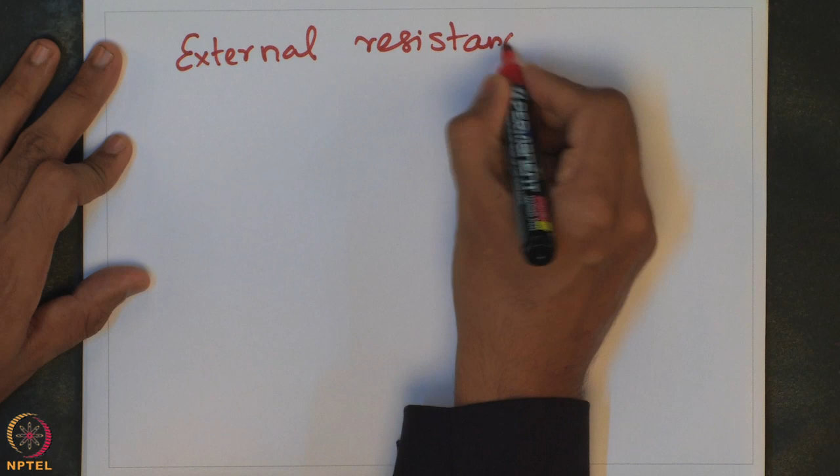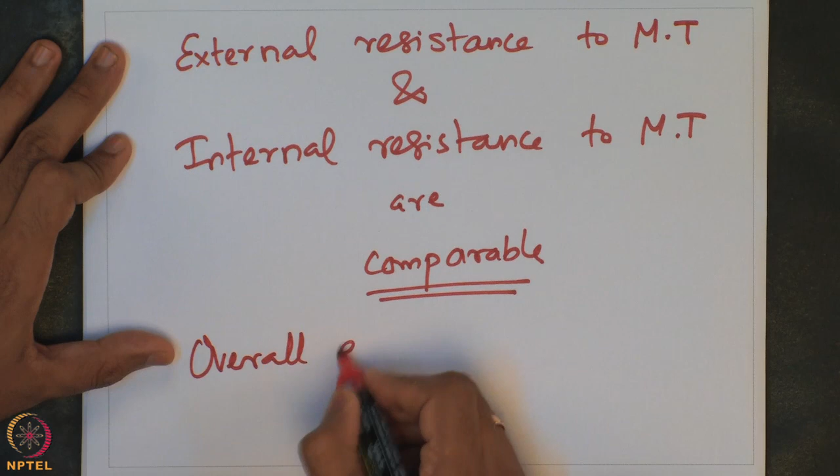We will assume that the external resistance to mass transport and the internal resistance to mass transport are comparable. We are going to look at what is called the overall effectiveness factor, defining this quantity in this lecture, which accounts for both the external resistance to mass transport and the internal resistance to mass transport. We will particularly look at the case of a first order reaction.

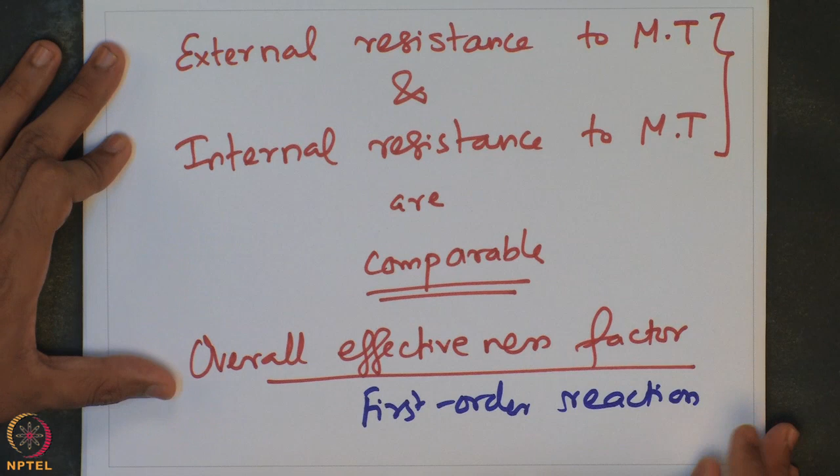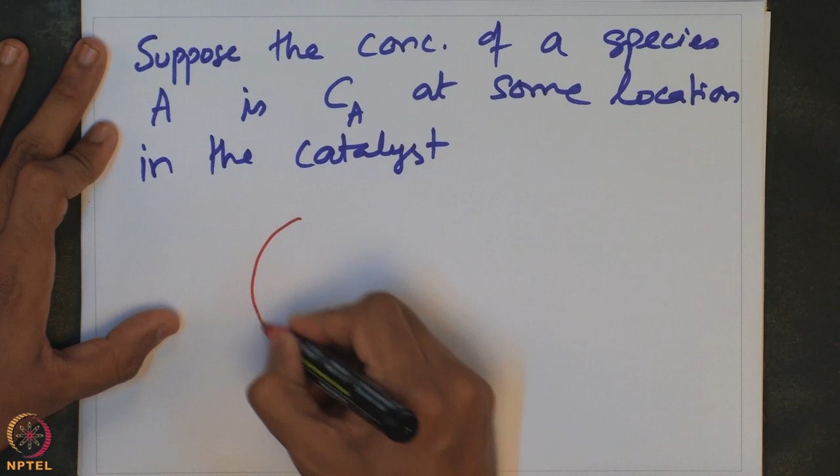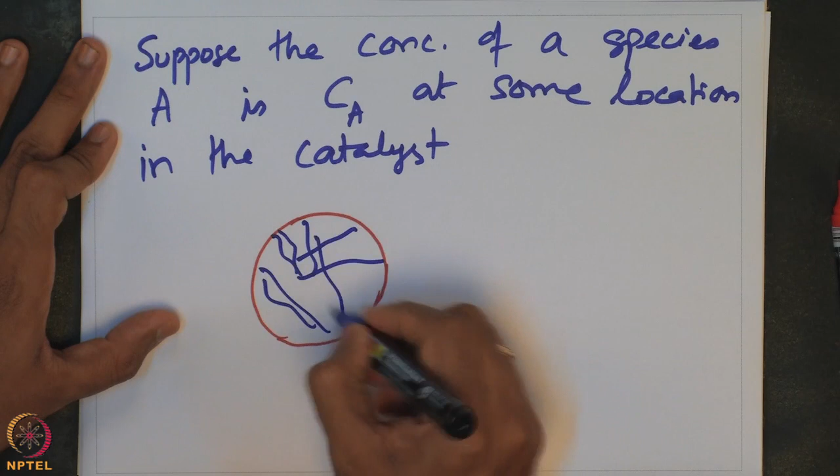Suppose the concentration of a reacting species A is, let us say, Ca at some location in the catalyst. Let us sketch a catalyst here. Suppose we have a spherical catalyst, and the pores present here are the pores in the catalyst pellet. Let the bulk concentration of the species be Ca,bulk, the surface concentration be Cas, and the concentration at some location inside the catalyst be Ca.

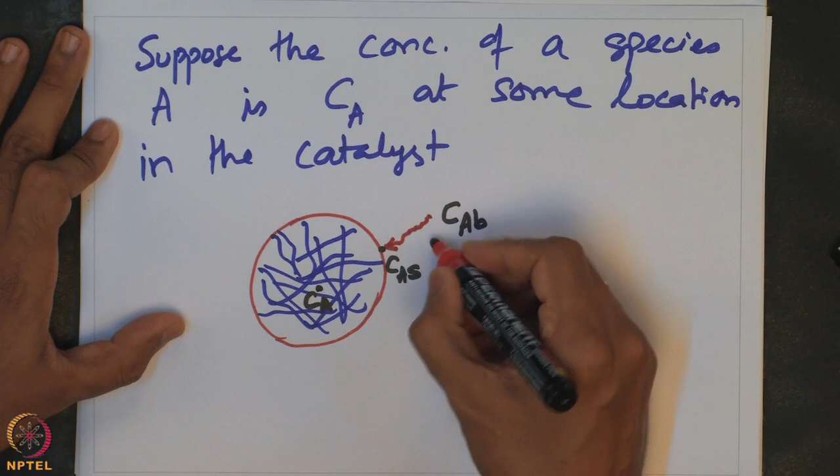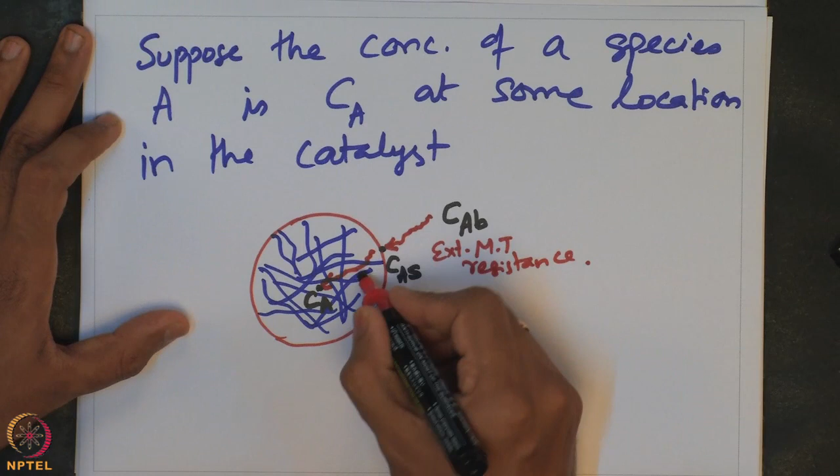So now we have species diffusing from the bulk to the surface of the catalyst, and there is a resistance offered because of this diffusion — that is the external mass transport resistance. Then there is a resistance offered for transport inside the catalyst, that is species going from the surface, at concentration Cas, to some concentration Ca inside the catalyst. This is essentially the internal resistance to mass transport.

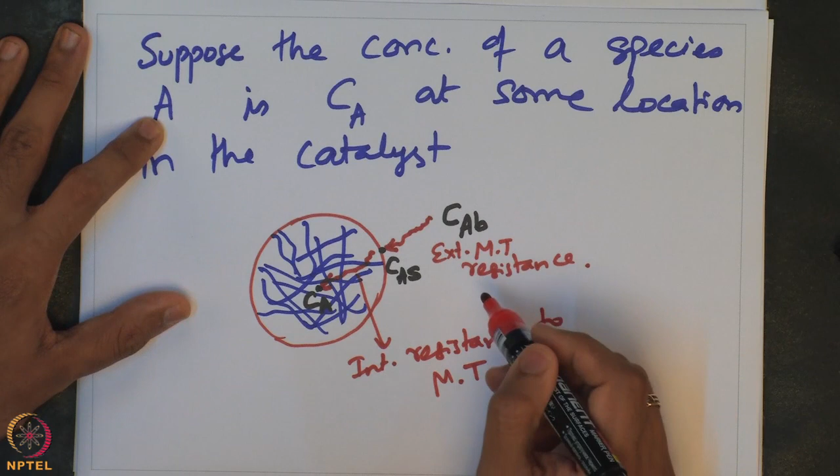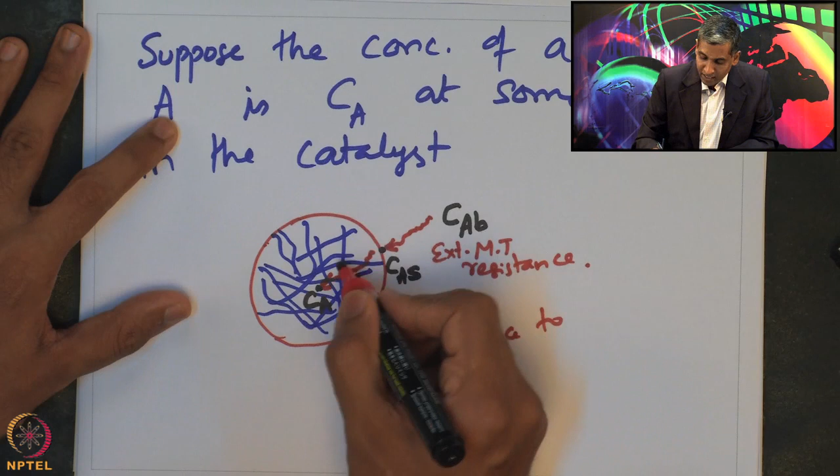Earlier we observed that when the external mass transport resistance is the only significant resistance compared to the internal mass transport resistance, the reaction gets completed very close to the external surface of the catalyst. On the other hand, if external mass transport resistance is very small compared to internal resistance, the reaction happens in several parts inside the catalyst, in the active surface area in the pores, and the extent of species penetration inside depends on the extent of the internal resistance offered to mass transport.

As a result, one can think of a situation where if the resistances are comparable for both external mass transport and internal mass transport, the reaction would happen both at or close to the surface of the pellet and also in the active surface in the pores inside the catalyst pellet. So what is the reaction area? What is the area in which the reaction happens now, if this is comparable?

The area in which reaction occurs would be the internal area plus the external surface area. So the reaction would essentially happen on both the internal and external surface area. If we now say that these two resistances are actually comparable, then we have to consider the area where the reaction happens as both the external surface area of the catalyst pellet across the whole reactor bed, and also the internal catalyst pellet area available in every catalyst present in the bed. Let us see how to consider both of these simultaneously.

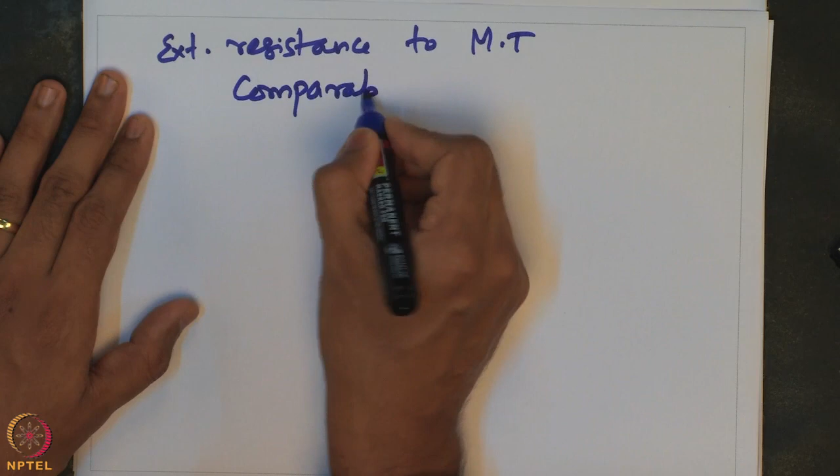Suppose the external resistance to mass transport is comparable to the internal resistance to mass transport. Then at steady state, what will be the rate at which the overall reaction will occur?

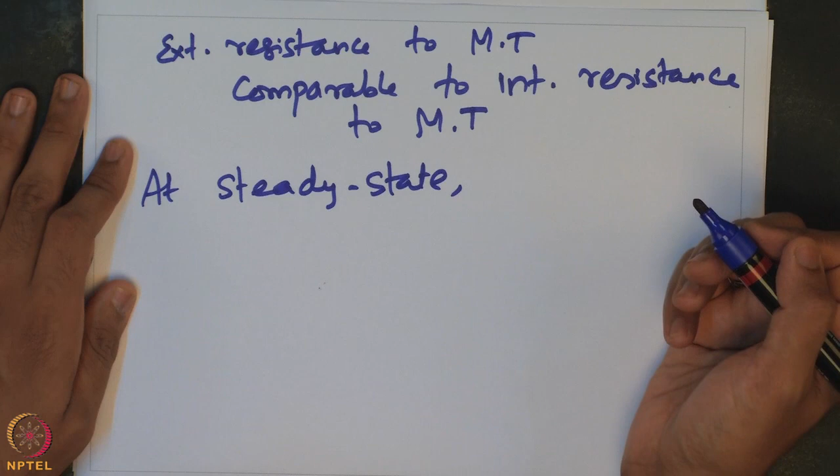The rate at which the overall reaction would occur in the catalyst would be equal to the rate at which the species actually diffuses from the bulk to the surface of the catalyst pellet.

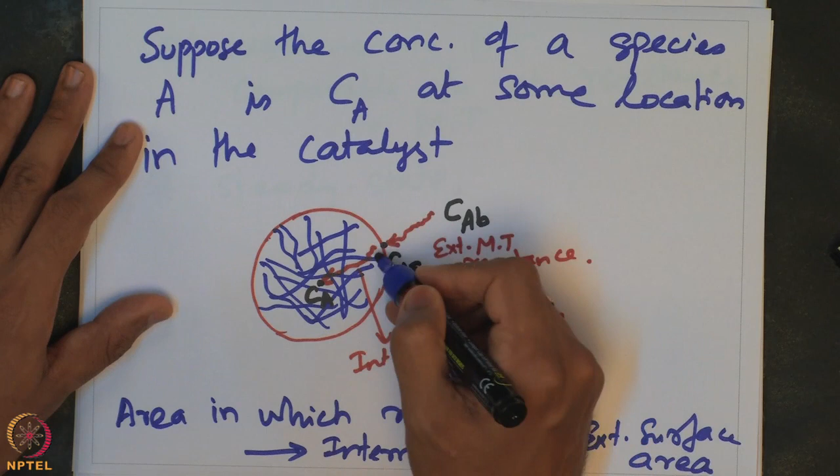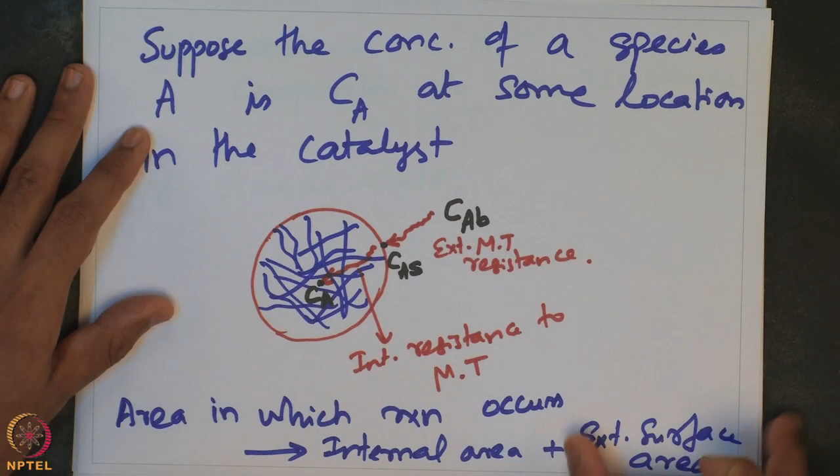Why is that? Let us look at the sketch we drew a little while ago. The rate at which the species comes to the surface will be comparable to, and at steady state should be equal to, the rate at which the species actually goes inside the catalyst, because the resistances are comparable. Therefore, the overall rate at which the reaction occurs should essentially be equal to the rate at which the species is transported from bulk to the surface, because this rate is what makes the species available for the reaction to happen. So the rate at which species is transferred from bulk to surface should equal the overall rate at which the reaction happens in the catalyst pellet.

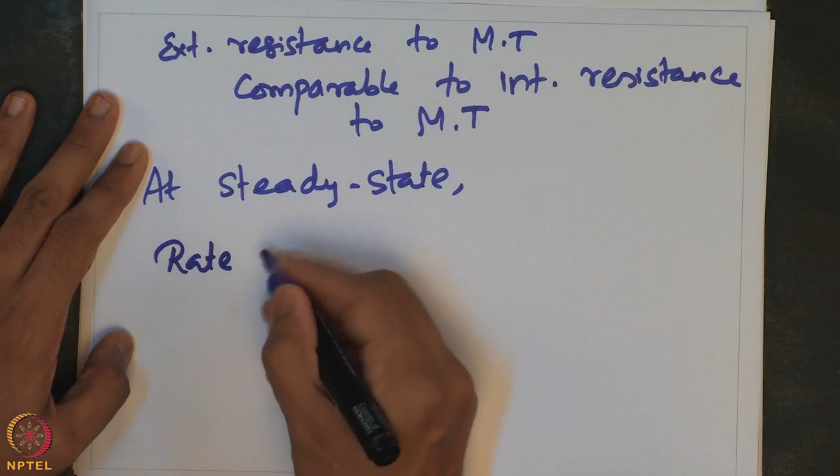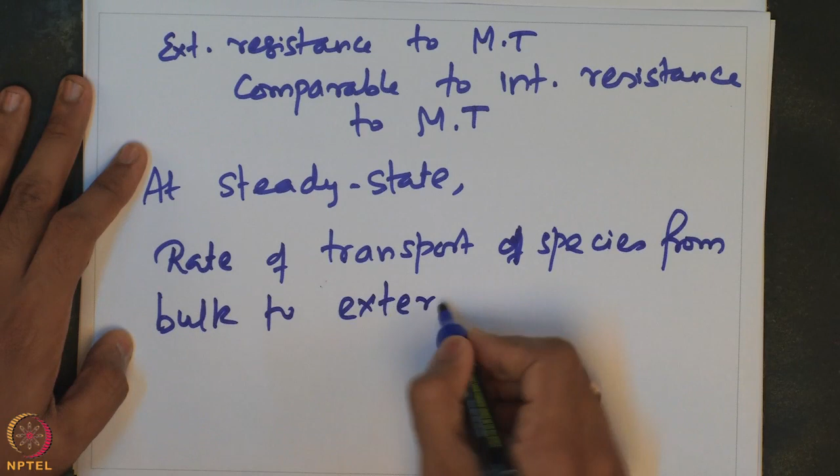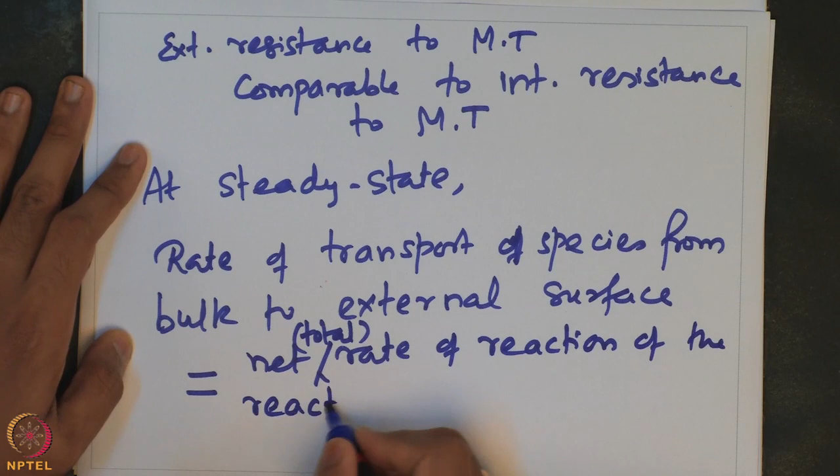So, therefore, the rate of transport of species from bulk to external surface should be equal to the net rate, or total rate, of reaction of the reactant within and on the pellet.

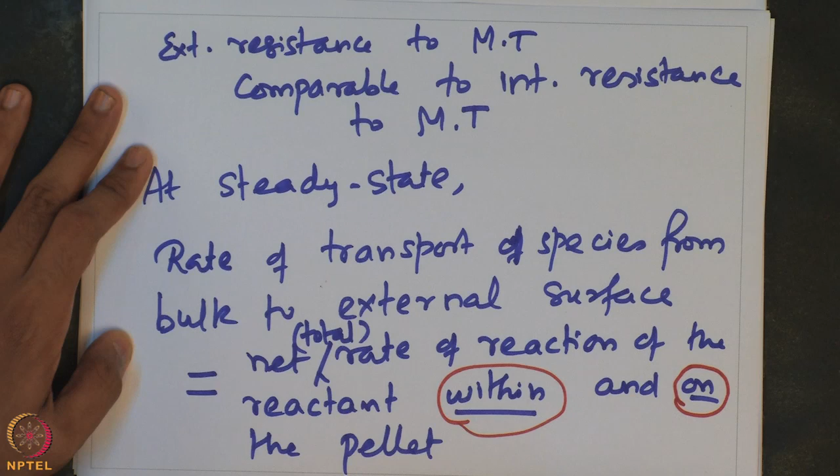Recall the point I mentioned a few moments ago, that when both resistances are comparable, the reaction essentially happens both at the surface of the catalyst pellet and also at the active surfaces inside the catalyst pellet where the reactants are available. So the net rate of reaction is essentially within and on the catalyst pellet. Therefore, if we equate the rate of transport of species from bulk to the external surface to the total rate of reaction, we should consider both the surface area available for reaction within the pellet and also on the external surface of the catalyst pellet.

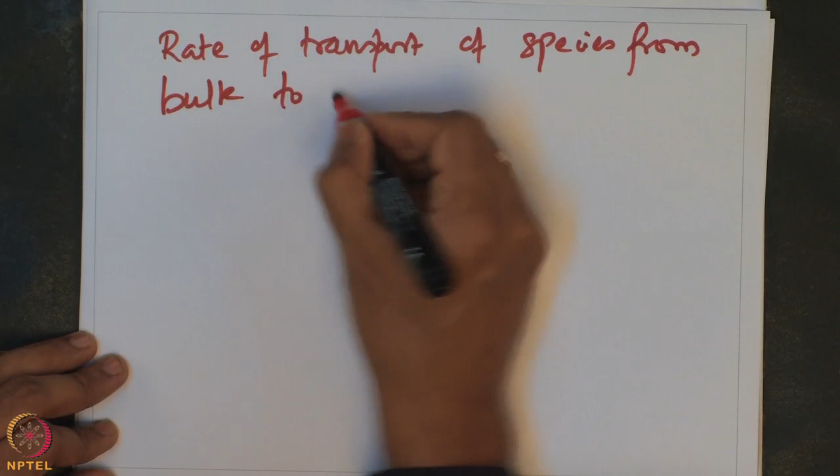So now, if I want to find out the rate of transport of species from bulk to catalyst surface, how do I do this? We have already seen this before. The rate at which the species gets transported from the bulk to the surface can be related to the flux of the transport of the species from the bulk to the catalyst surface. Let us see how to do that.

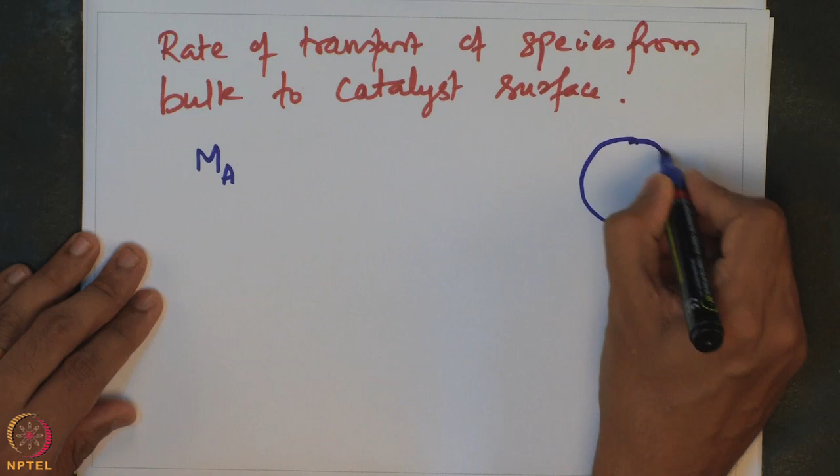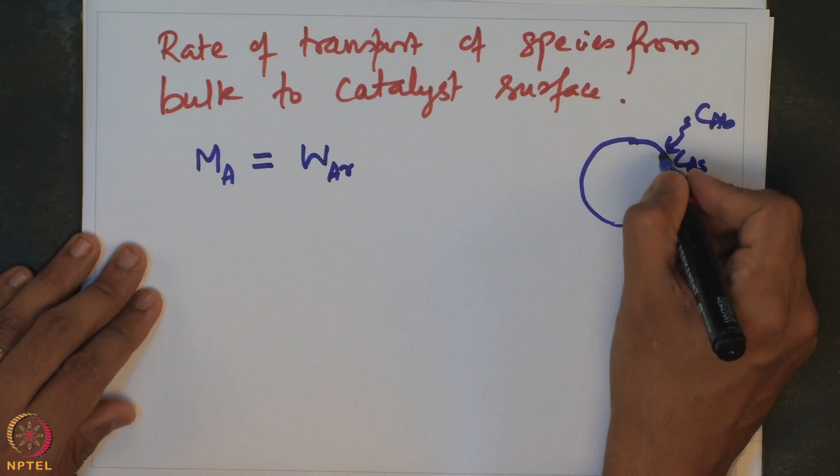So, the molar rate at which the species is transferred from the bulk to the surface of the catalyst pellet should be equal to the radial flux with which the species is transported from bulk to catalyst surface, multiplied by the surface area per unit volume of the reactor, multiplied by the volume of the reactor. Note that we now want to consider that the catalyst particles are present all through the bed, and the reaction is happening at every catalyst pellet's surface and inside it, all through everywhere in the reactor. So we need to consider the reactor volume as well, and that is what delta V represents essentially, the volume of the reactor.

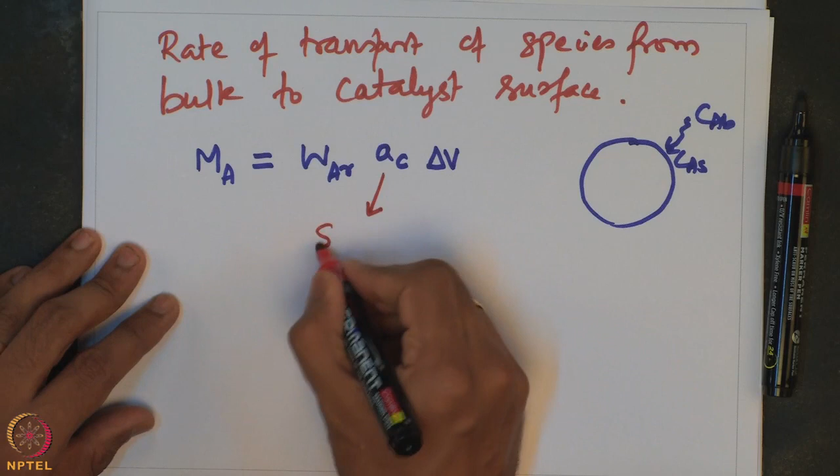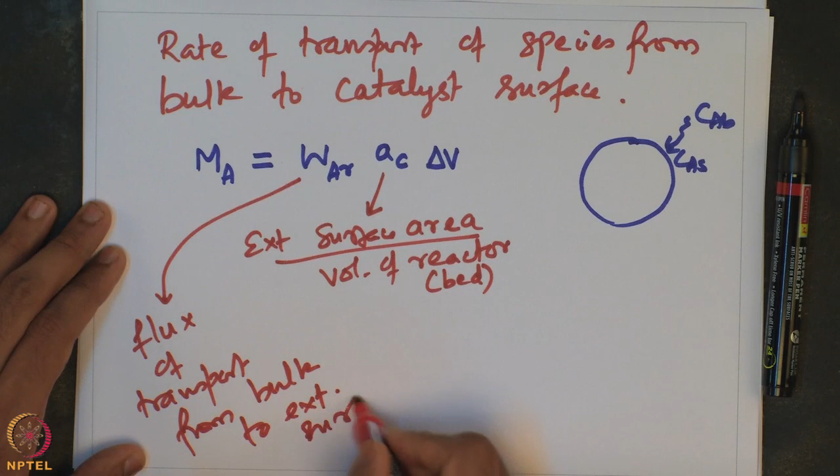What is AC? AC is the external surface area per volume of the reactor or volume of the bed, and this is the flux of transport from bulk to external surface, and this is the reactor volume.

Why do we consider external surface area here? We consider it because the species diffusing from the bulk to the surface essentially has its flux happening at the external surface area. So we need to look at the total external surface area available per unit volume of the reactor bed, which is captured by the quantity AC.

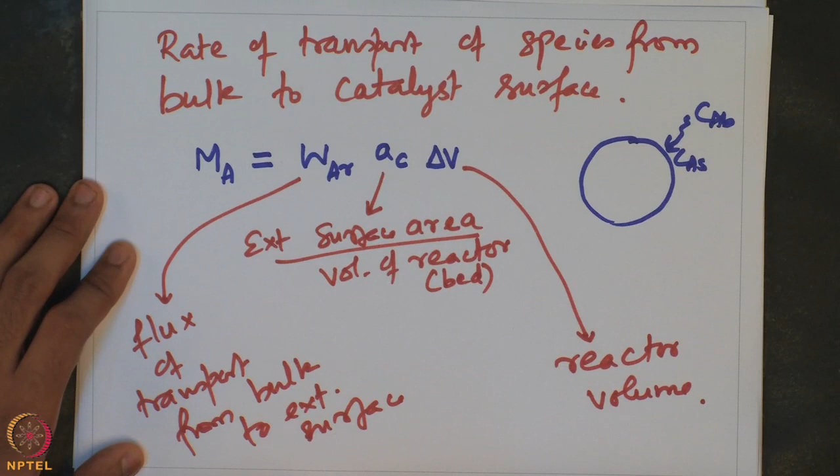Now, this needs to be equated to the rate at which the reaction is actually happening within and on the external surface of the catalyst pellet. Let us see how to do that.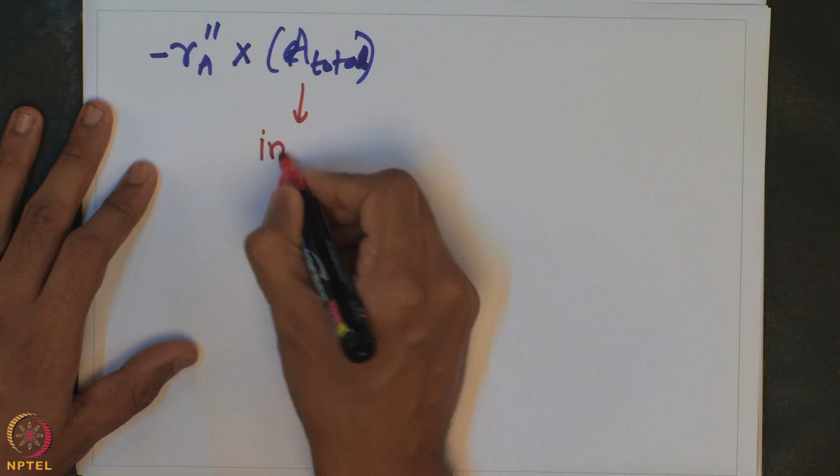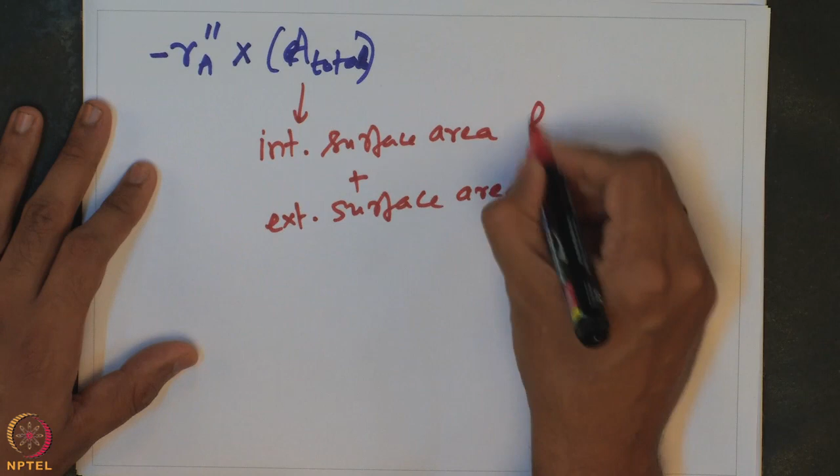Minus RA double prime is the rate at which the reaction happens per unit surface area available for the reaction, multiplied by the total area A total available for the reaction. How do we find the total area available? A total is basically the internal surface area plus the external surface area available for the reaction to occur.

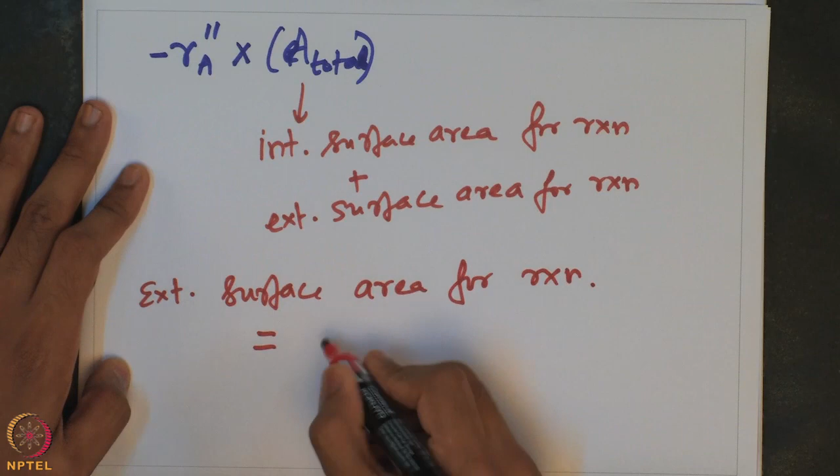Let us first estimate what this total area is. How do we calculate the external surface area? External surface area for reaction is essentially given by AC, the external surface area per unit volume of the reactor, multiplied by the volume of the reactor itself.

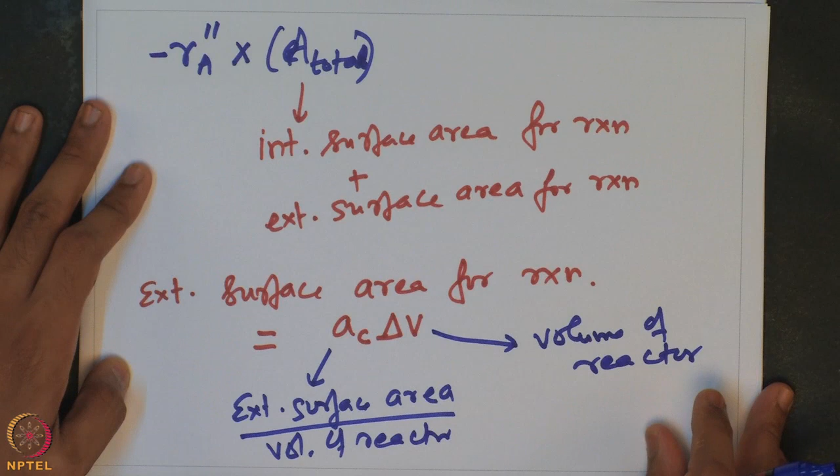How do we find the internal surface area? Let us look at how to find it. The internal surface area for reaction is essentially given by the internal area per mass of the catalyst.

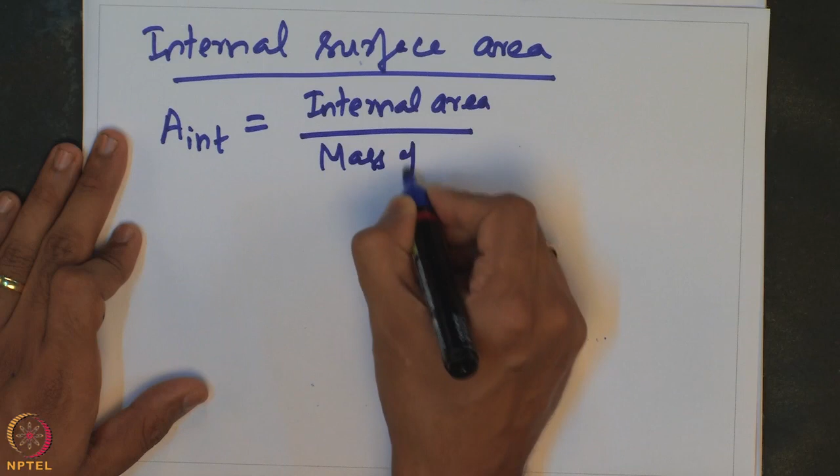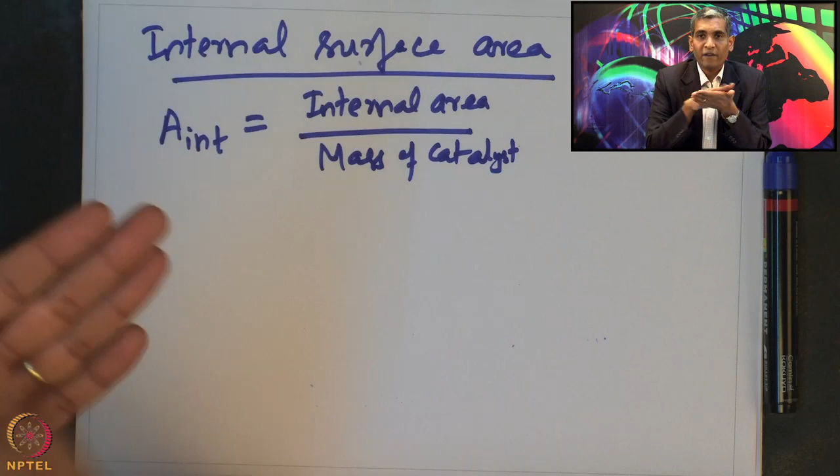Typically, information about a catalyst pellet gives the internal area available. Recall that the catalyst is porous, with pores present, and each pore has active surface coated with the active catalyst material. Characterization of a catalyst pellet gives the total surface area available in the pores for reaction per unit weight of catalyst. This is an important specification for a catalyst pellet, and we can use this information to find the total internal area available for reaction in a bed. Let us see how to do that.

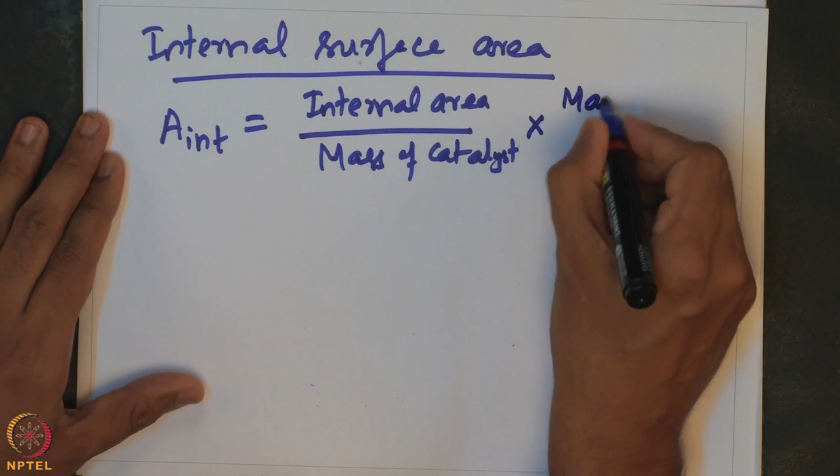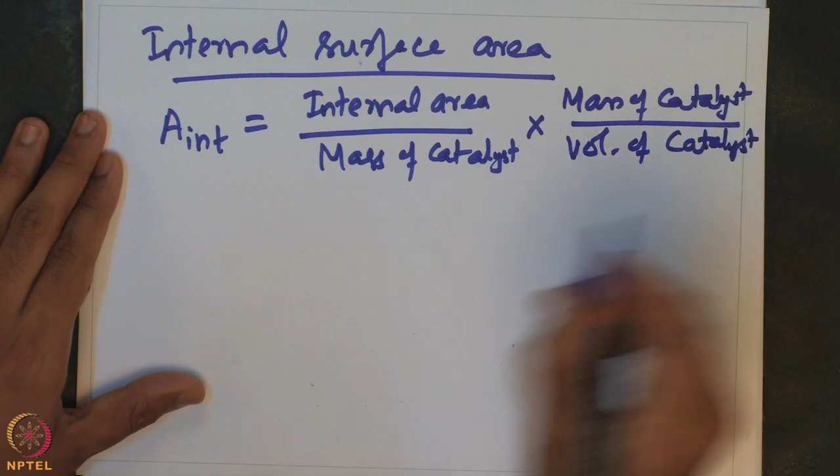This internal area per mass of catalyst is typically available as a property of the catalyst, multiplied by mass of catalyst per volume of catalyst, which is nothing but the density of the catalyst, multiplied by volume of catalyst per volume of the reactor, and multiplied by volume of reactor, will give the total internal area available. This term is the density of the catalyst, and this term is related to the porosity of the bed, which tells us the ratio of volume of catalyst to volume of reactor.

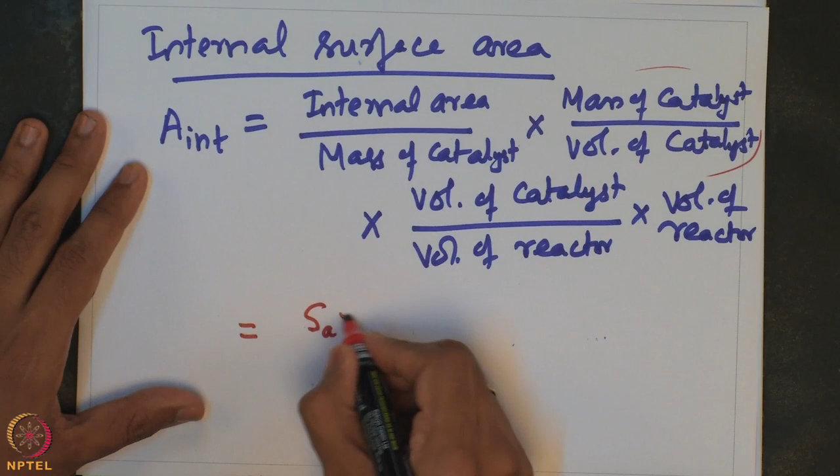Let us plug all this information in. Suppose SA is the internal area per mass of catalyst, and rho C is the density of the catalyst, multiplied by volume of catalyst divided by volume of reactor, which is 1 minus phi, where phi is the porosity, multiplied by delta V, will tell us the internal area actually available for the reaction to happen inside the pores.

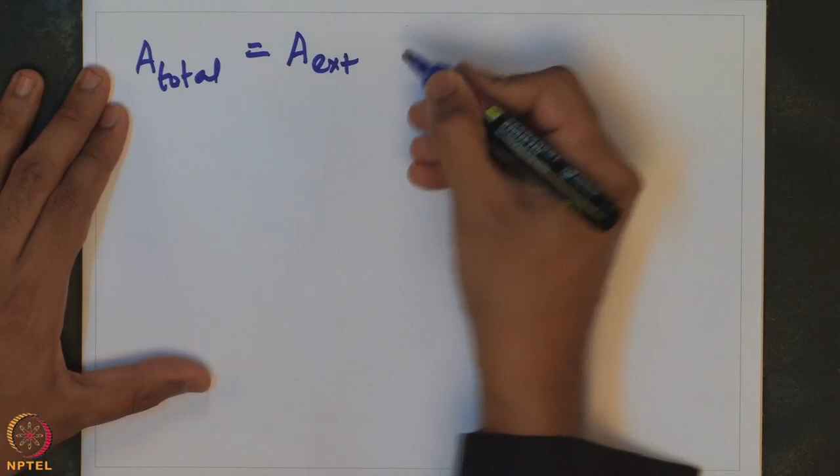Once we know the internal and external area available, we can find the overall rate at which the reaction happens in the catalyst pellet. Let us see how to do that. A total is equal to the external area available for reaction plus the internal area available for reaction. What is the external area available?

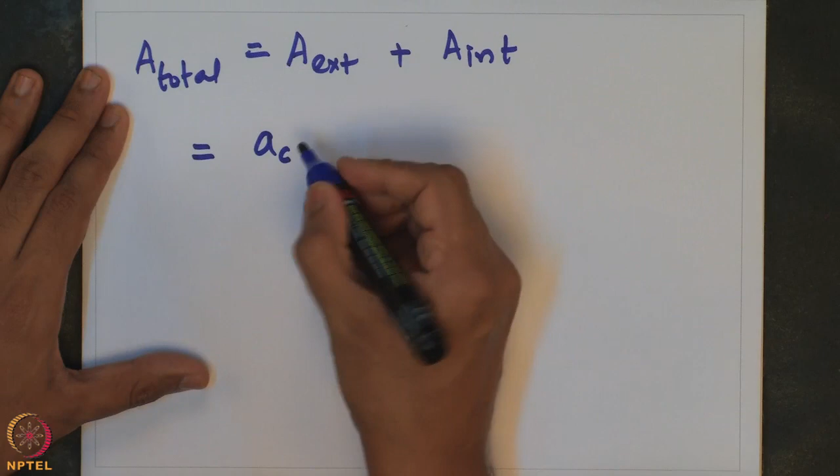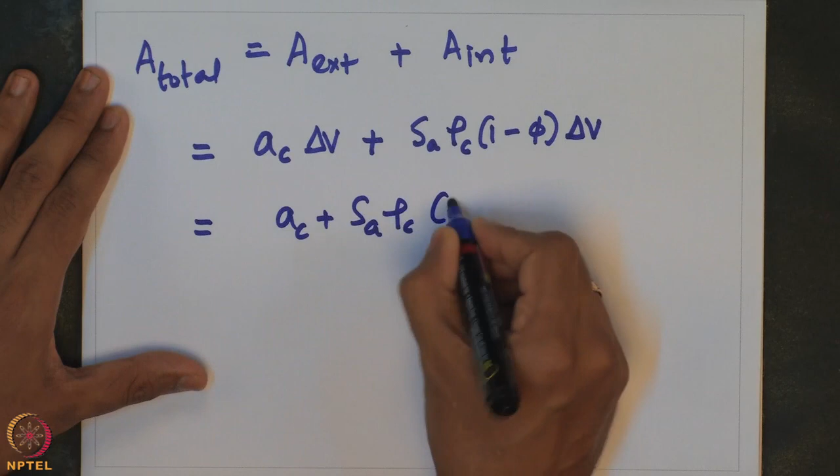We already saw that AC is the area available per unit volume of the reactor multiplied by delta V, which is the volume of the reactor. The internal area we looked at is the area of active surface per mass of catalyst multiplied by the density of the catalyst, into the volume of catalyst per volume of reactor, into delta V. That is nothing but AC plus SA rho C into 1 minus phi, multiplied by delta V.

What is rho C into 1 minus phi? Rho C is the density of the catalyst, and that multiplied by the volume of the catalyst divided by the volume of the reactor essentially tells me the bulk density of the reactor. So the mass of catalyst per volume of catalyst, multiplied by the volume of catalyst packed in a reactor, divided by the volume of the reactor, is nothing but the bulk density of the catalyst in the reactor. So, if I call this my bulk density...

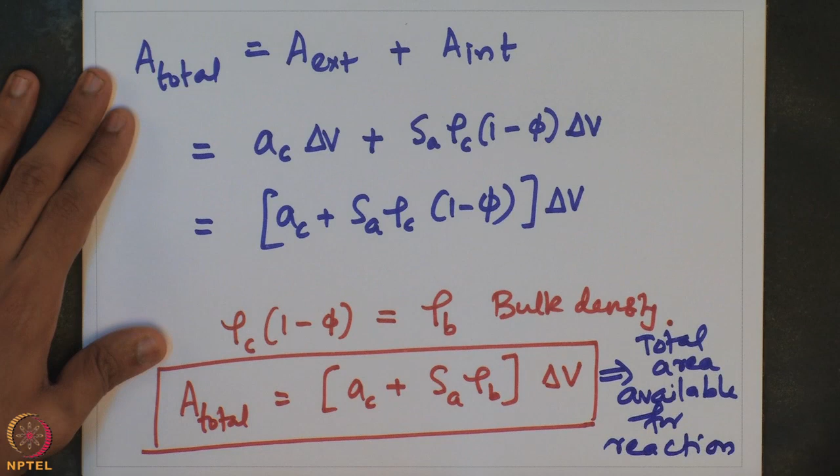I can rewrite the total area available as AC plus SA into rho B into delta V. This is the total area available for reaction all through the bed, that is, in the total volume of the bed. The total area available for the reaction to happen is essentially given by this expression here.

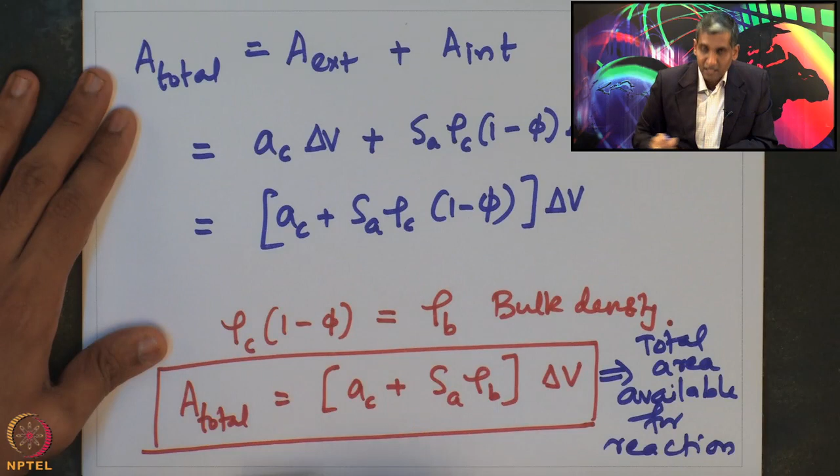Once we know this expression, we can substitute it into the overall rate at which the reaction happens in terms of the surface area available for the reaction. If we multiply, we will be able to find out the overall rate at which the reaction happens at steady state. Let us look at that.

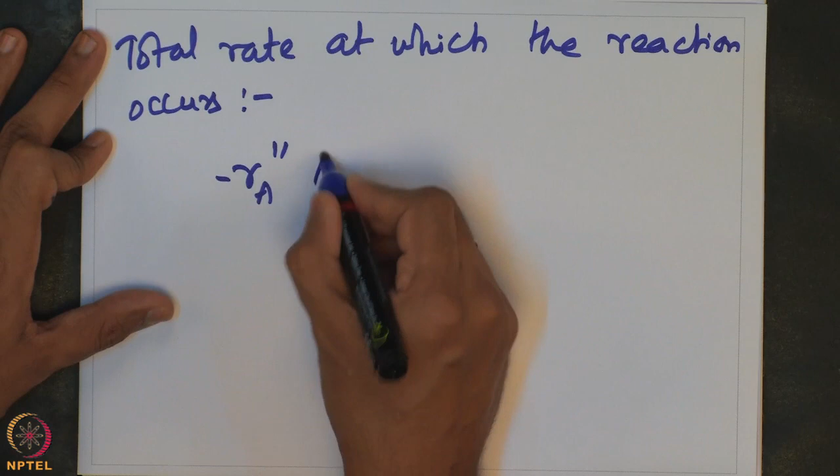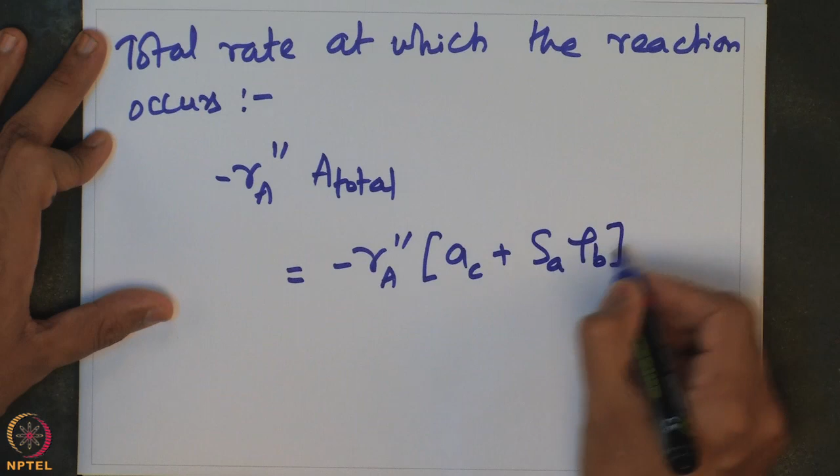So, total rate at which the reaction occurs is essentially given by minus RA double prime, which is the rate per unit surface area, multiplied by the total area. That is equal to minus RA double prime into AC plus SA into bulk density into delta V. So, this is the overall rate at which the reaction happens.

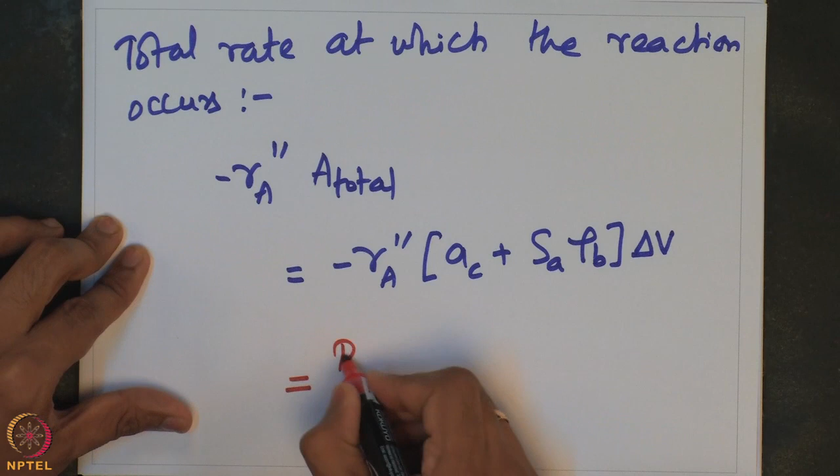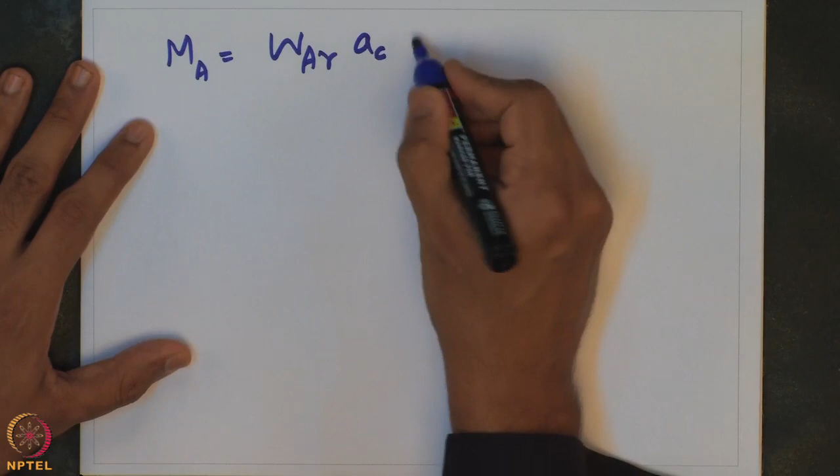Now, we observed that this rate should be equal to the rate of transport of species from bulk to the catalyst surface. We already saw what is the expression for this particular rate of transport: the rate of transport MA is equal to the flux with which the species is transported from bulk to the surface, multiplied by the area per unit volume of the bed, multiplied by the volume of the reactor itself.

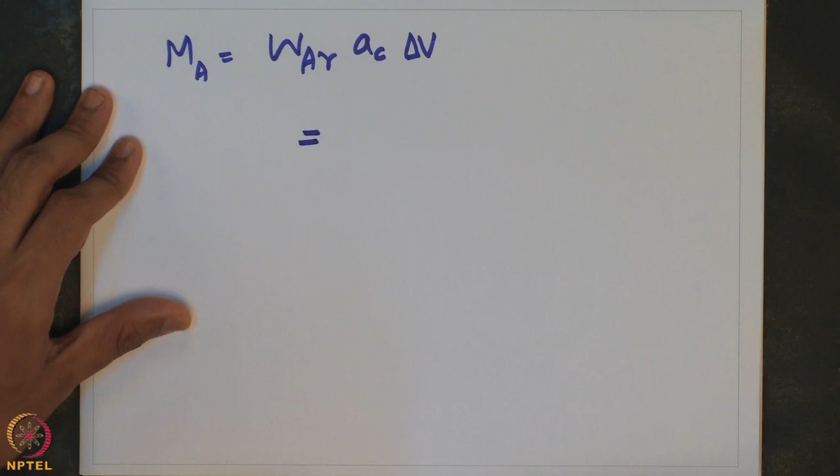Now, equating this to the overall rate at which the reaction happens, that should be equal to minus RA double prime into AC plus SA into rho B into delta V. So, this is the balance between the transport of species from bulk to the surface and the rate at which the reaction happens in the catalyst.

Now, we know the expression for the flux with which the species is transported, and we can substitute that to find the relationship between the transport of species from the bulk to the surface and the overall rate at which the reaction happens. But before we do that, let us look at the quantitative range for these two values. Let us take a specific example.

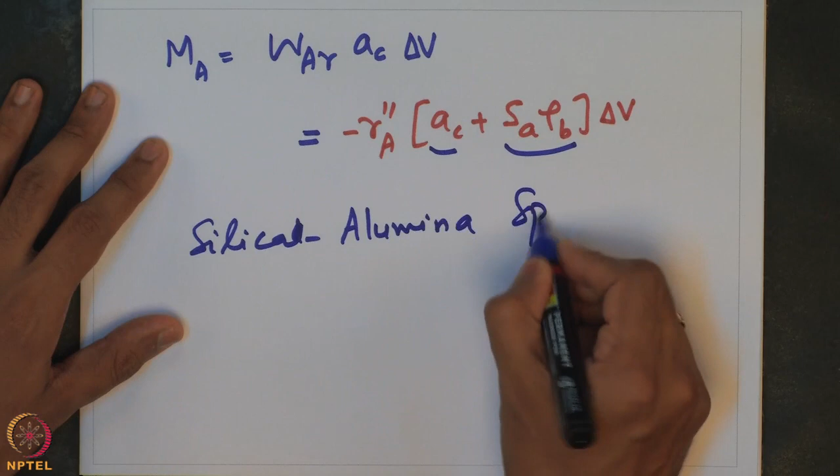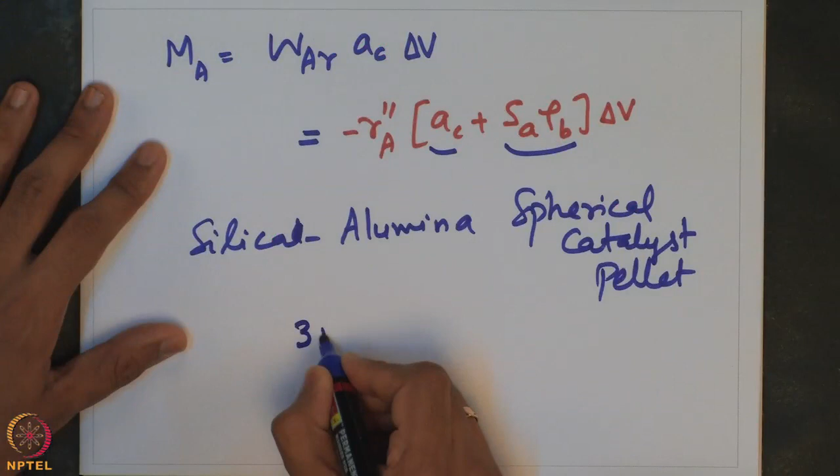Suppose we take the silica-alumina spherical catalyst pellet. What is the typical size of a catalyst pellet? We already saw several examples in this course, and we even saw the actual catalyst, how it looks like. Typically, the diameter of a catalyst pellet is about 3 millimeters, which is equal to the pellet diameter, approximately 3 into 10 power minus 3 meters.

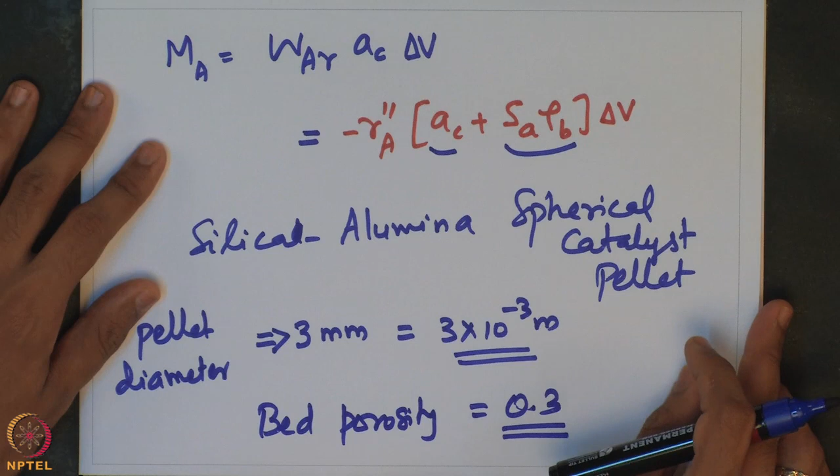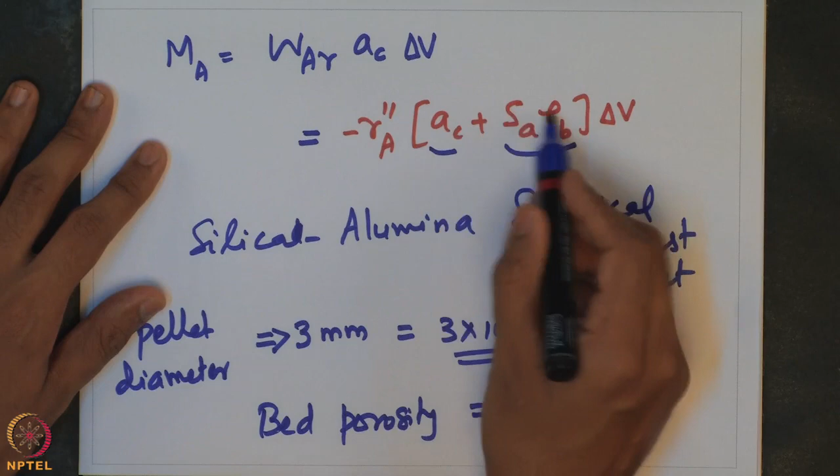Now, what is the typical bed porosity? Suppose we assume that the bed porosity is about 0.3. We can estimate the surface area which is available for the reaction per reactor volume, and we can also estimate the surface area available inside the pellet, and multiply it by the density, to get a quantitative comparison of the values for these two quantities. Let us see how to do that.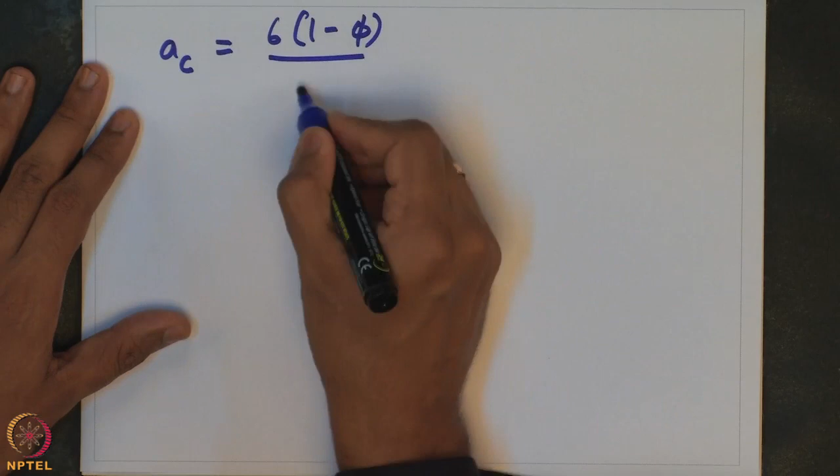So, the surface area per unit volume of the reactor for a spherical particle is essentially given by 6 into 1 minus phi, divided by dp. dp is the particle diameter.

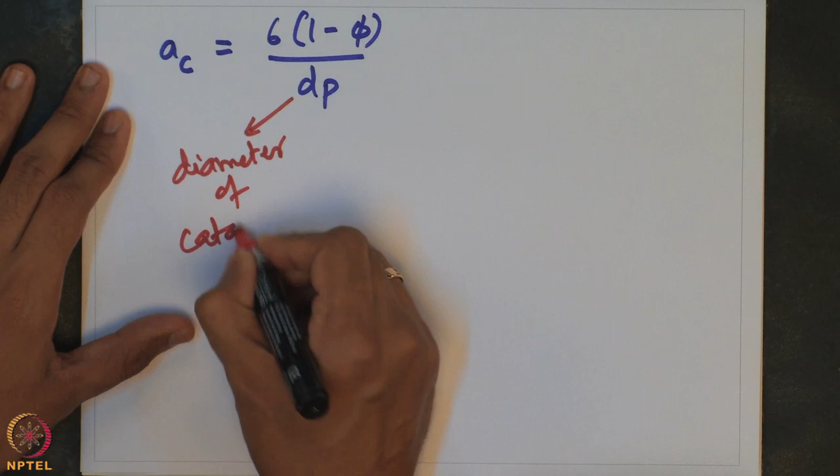Diameter of the catalyst pellet, so we substitute these numbers: 6 into 1 minus 0.3 divided by 3 into 10 power minus 3. That is equal to 6 into 0.7 divided by 3 into 10 power minus 3, which is approximately equal to 1400 meter square per meter cube. So this is the area.

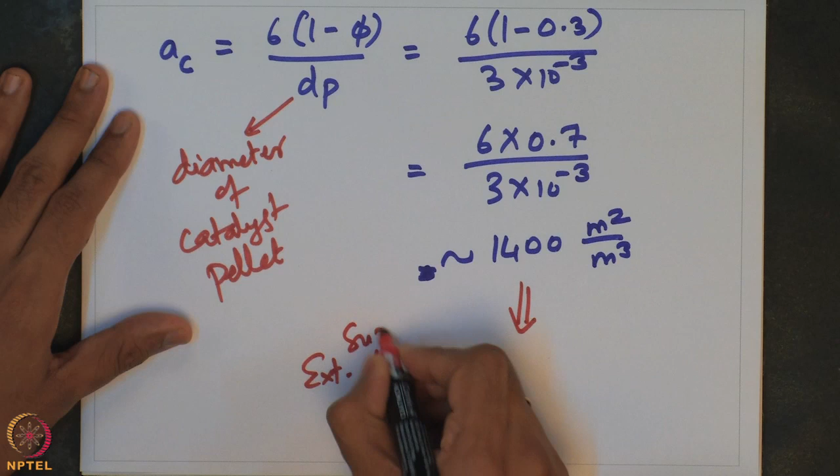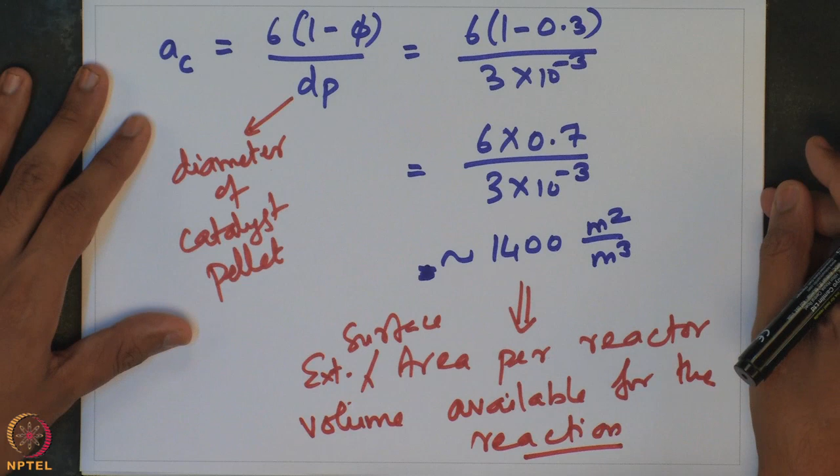External surface area per reactor volume available for the reaction. So that is the typical external surface area per unit volume of the reactor available for the reaction. Next, let us look at what is the internal surface area which is available.

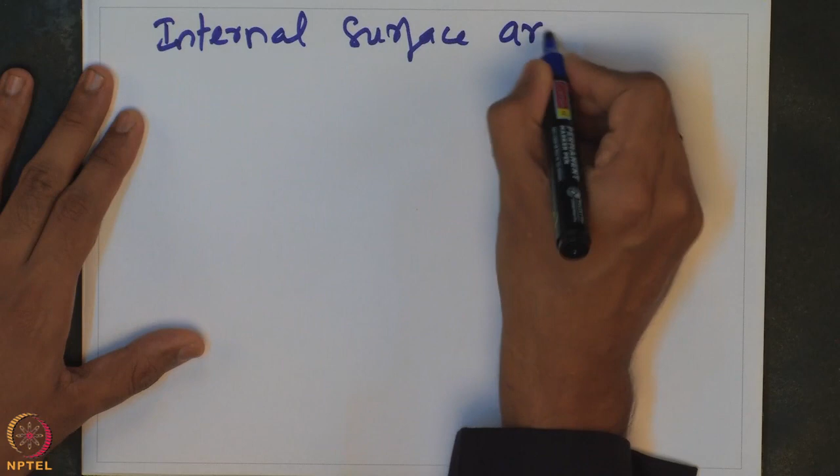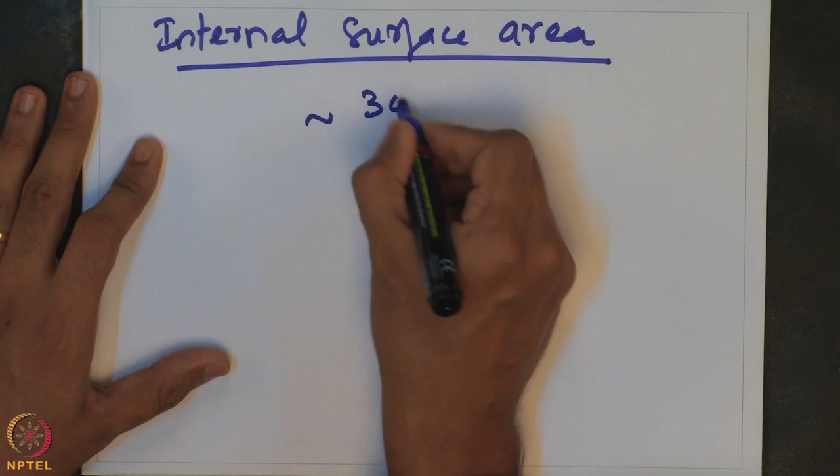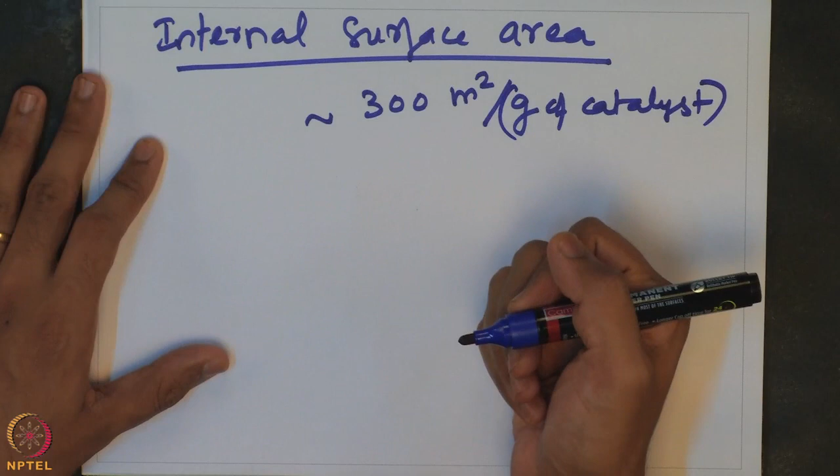Let us now calculate what is the typical internal surface area which may be available. The typical internal surface area for these kinds of catalysts is of the order of magnitude of 300 meter square per gram of catalyst. That is the typical internal surface area available for the reaction in a catalyst pellet approximately 3 millimeters in diameter, impregnated with the catalyst material. Now suppose we want to calculate the bulk density.

We can estimate the bulk density, which is essentially equal to the density of the catalyst into 1 minus phi, where phi is the porosity. What is the typical density of catalyst? For the silica alumina catalyst, the density is typically in the range of about 400 kilogram per meter cube. Converting this into grams: 400 into 10 to the power 3 into 1 minus 0.3, which is approximately equal to 280 into 10 power 3 gram per meter cube, the density of the catalyst in grams per meter cube.

Now what is the next thing we need? We need to multiply the internal surface area available for reaction and the bulk density. So, SA into rho B is equal to 300 into 280 into 10 to the power 3, which is approximately equal to 84 into 10 power 6 meter square per meter cube.

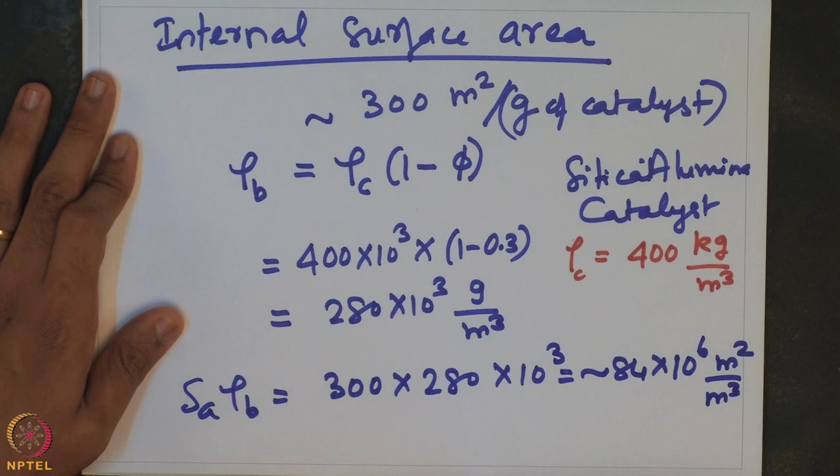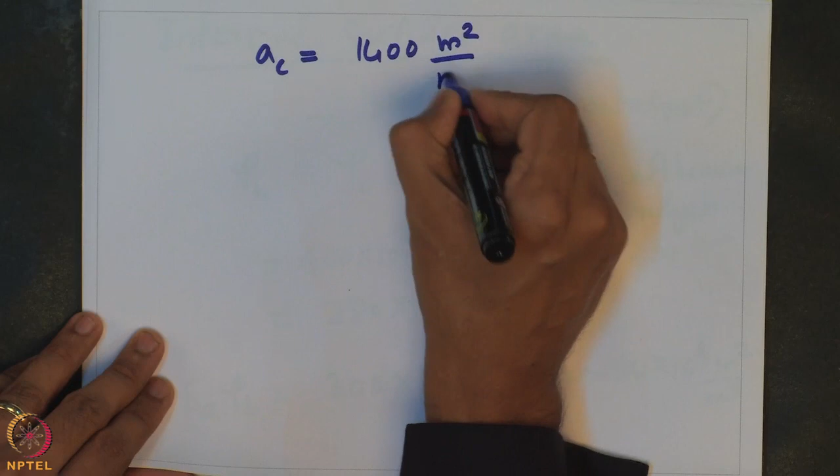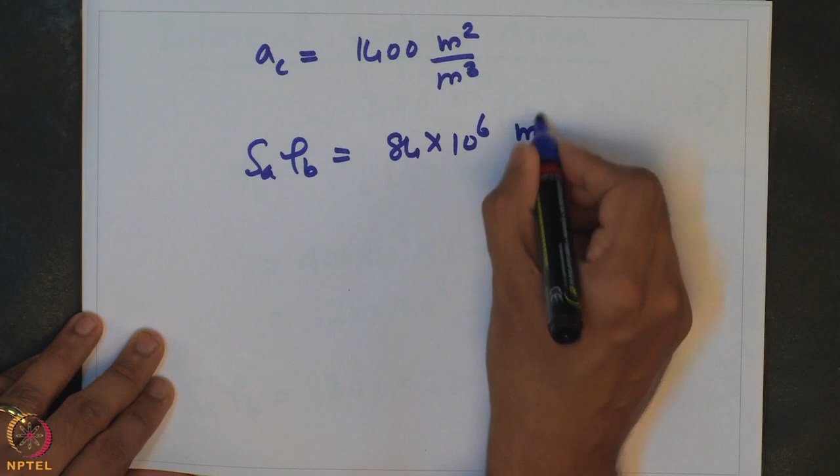Let us now compare this with the external surface area which is available. We noted that the external surface area AC is equal to 1400 meter square per meter cube, and the internal surface area multiplied by the bulk density is equal to 84 into 10 power 6 meter square per meter cube. If you look at these numbers, the internal surface area available for the reaction is typically much larger than the external surface area actually available for reaction.

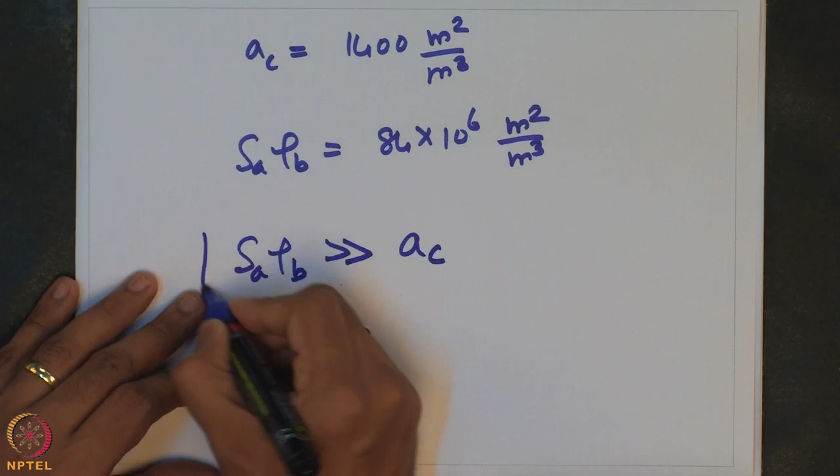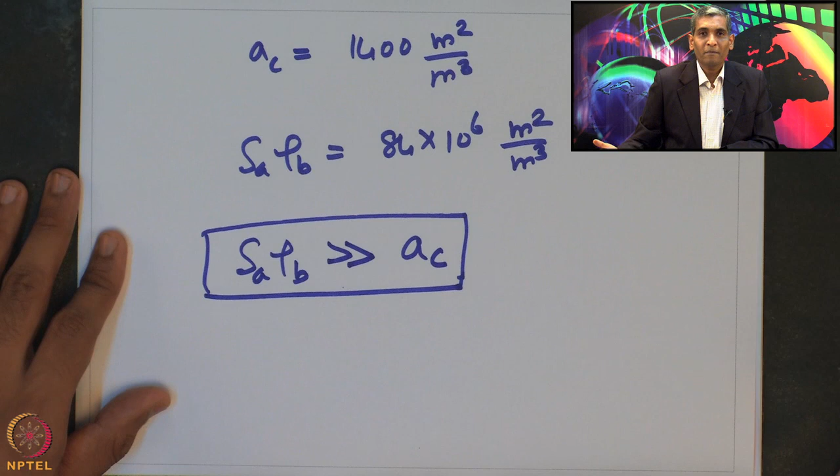So the observation is that SA into rho B is typically much larger than the external surface area per unit volume of the reactor, and this is typically true for most catalyst pellets. The size of the catalyst pellet could be 1 mm larger or smaller, but irrespective of that, the internal surface area multiplied by the bulk density is usually much larger than the external surface area per unit volume of the reactor available for reaction.

So what we have seen in this lecture is we assumed that the external resistance to mass transport and the internal resistance to mass transport are actually comparable in a catalyst pellet, and as a result, what controls the overall rate of reaction could be both the external and internal resistance. We specifically looked at a first order reaction where we compared these two limitations, estimating the overall rate at which the reaction occurs when both resistances are comparable. We also wrote a simple balance where the rate of transport from bulk to surface should equal the overall rate at which the reaction happens in the catalyst pellet, and compared the actual surface area available for reaction within the catalyst pellet to the external surface.

In the next class, we will take this forward and compare the rates at which the reaction happens inside and the rate of transport, and estimate an important quantity called the overall effectiveness factor, and look at the implications of these. Thank you.